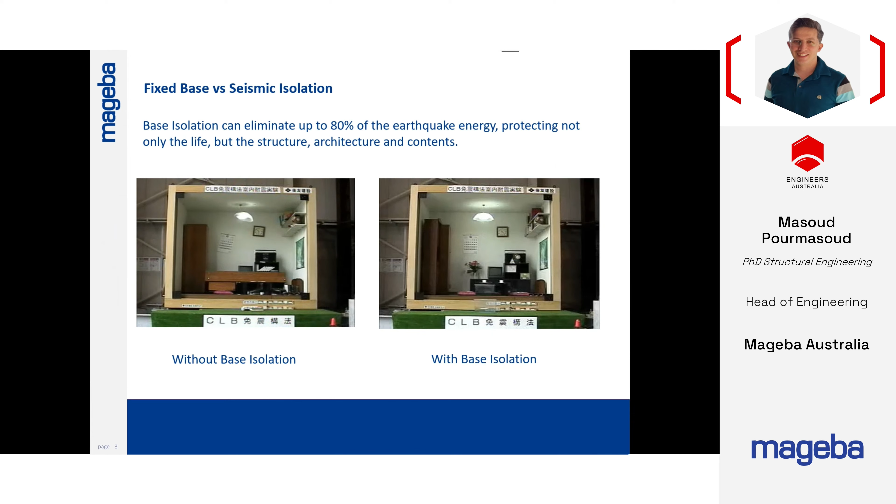I've got two quite simple physical models that illustrate how base isolators work. On the left-hand side, you can see the performance of a fixed base structure during an earthquake. The point is that even if the structure itself remains intact and sound, non-structural elements like decoration, lighting, or piping, which are quite sensitive to acceleration, are going to be damaged severely. On the right-hand side, you can see the concept of using base isolation. As you can see by movement of that box, the content remains kind of intact with minimum vibration, and doesn't end up with any level of damage.

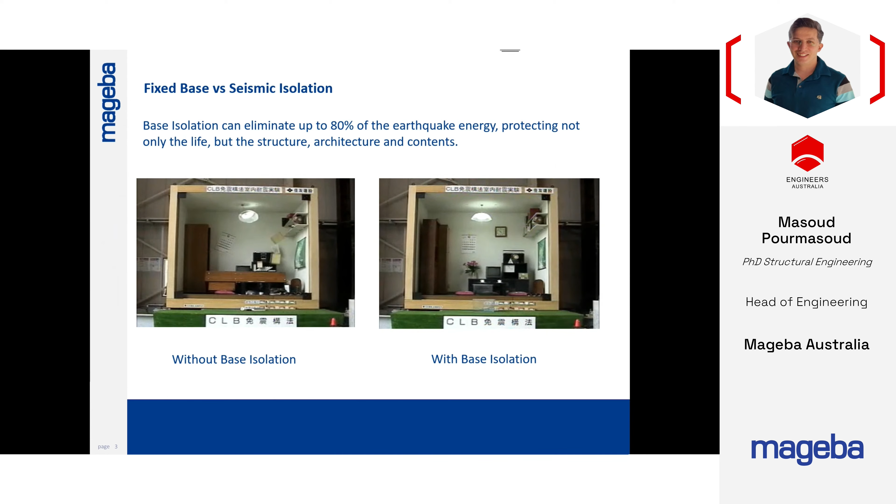This next one is a full-scale test that was carried out many years ago, but it's quite interesting for engineers to see how a real project works. The first one starts with a fixed base option.

9, 8, 7, 6, 5, 4, 3, 2, 1, running.

The violence and severity of the quake is clear. This would be a frightening experience not soon forgotten. The forces and displacements on the structure are extreme. At points during the shaking, floors 2 and 3 are displaced by nearly a foot in both directions. The heavy upper cladding is shaken violently, but remains attached. The lower cladding tears like paper. Interior furnishings are thrown about by the violent accelerations. Those that are unrestrained are tossed about like toys, while anchored items ride out the seismic storm, jerked to and fro, along with the walls and floors to which they are attached.

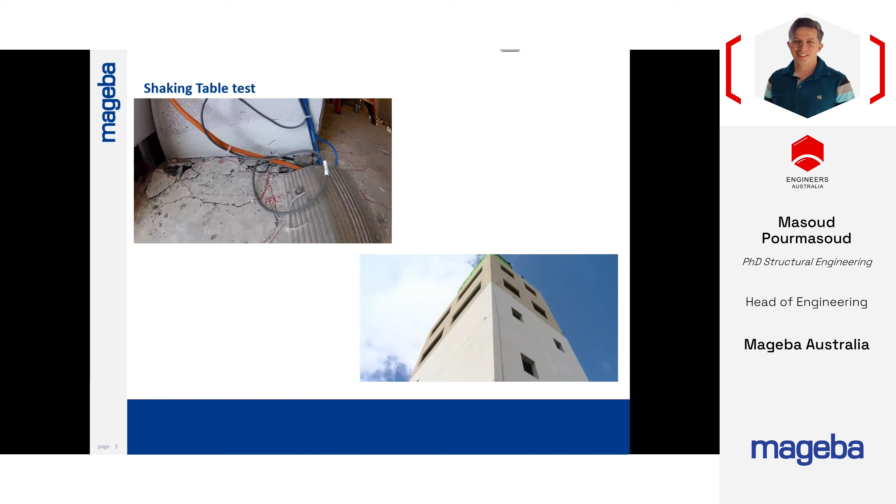We can see the rebars, they are naked now. At different floors, you can see the formation of the punching failure mechanism of the slab around the column, not far from really collapsing. From the 3rd floor to the 4th floor, the stairs are detached, they are hanging. There are a lot of huge gypsum boards that detached and fell off.

The building didn't collapse, however, it was prone to collapse actually. But before this test, the base isolated option was tested first because the researchers knew that it's not going to end up to any level of damage. So they first tested the base isolated one, and after that went for the fixed base one. And here we are, we're gonna go for the base isolated option.

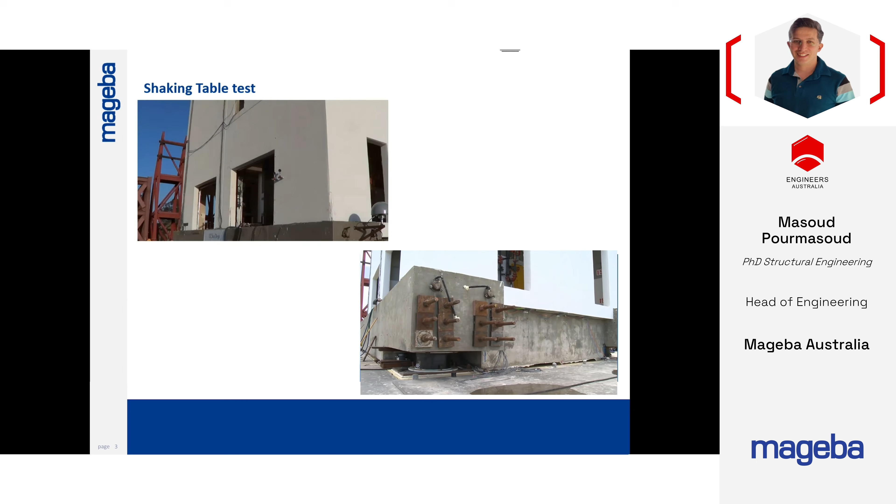Prior to conducting these ultimately damaging tests, the team had tested the building on seismic isolators in order to directly compare the effects of seismic isolation on the performance of non-structural elements. These huge rubber pads, each weighing over half a ton, support the building on 4 points, one at each corner of the structure, isolating the building from the earth and its motions.

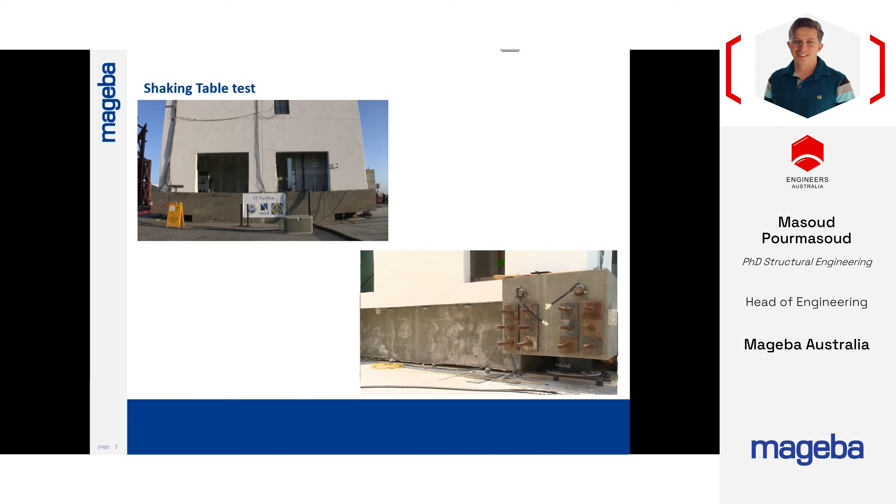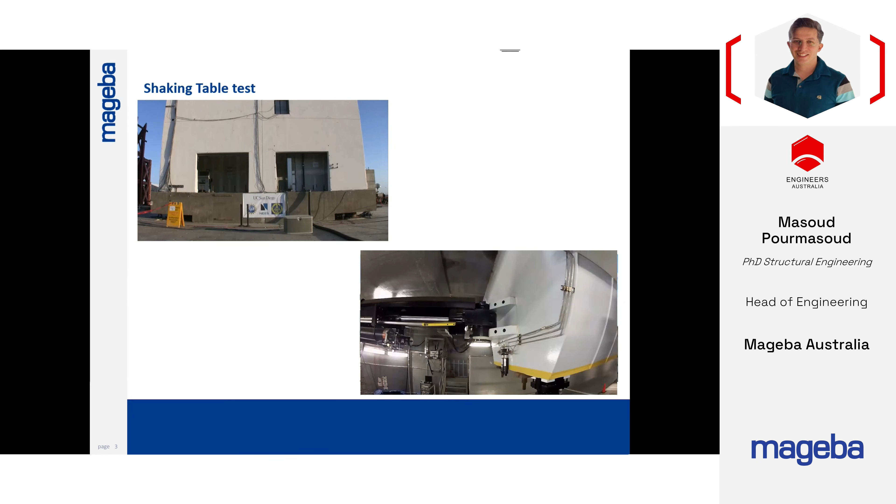In a test using a record from the magnitude 8 Ica, Peru earthquake of 2007, the effect of base isolation becomes obvious. As the table displaces, the isolators provide elastic joints between the earth and the structure, dramatically attenuating the accelerations that are transmitted to the building. The contrast with the motions in the other tests is clear.

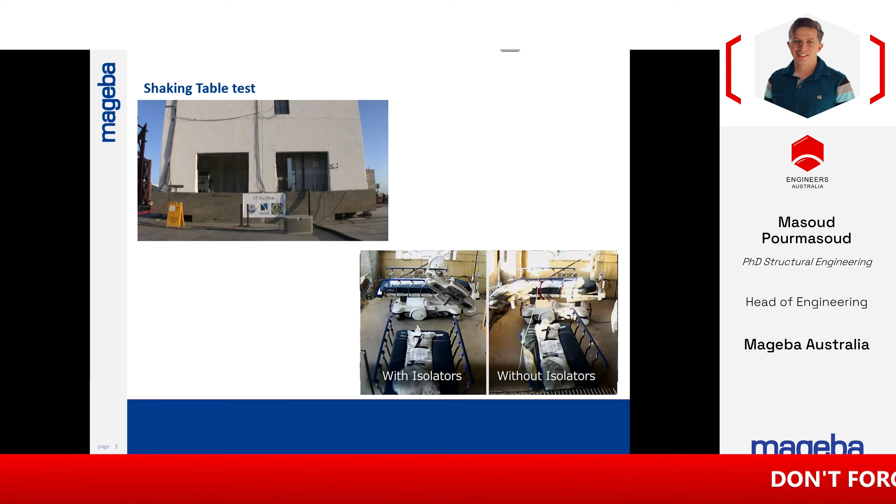With isolators, the building slides back and forth smoothly and easily. While objects and fixtures shift, the violent displacements and the destruction they wrought upon the building in the fixed foundation tests do not occur. 90% or so of the displacement that actually was imparted on the building was absorbed by the isolator, and so the result is relatively minimal impact on the contents and the non-structural elements in the building.

The hospital could remain functioning. The patients would be safe. The equipment, critical support equipment, would remain functioning. The electrical system in this building remained functioning, so life support equipment for patients would remain functioning. That's essential. The elevator remained functioning. The stairs were completely intact, so paths of egress through the building remained functional.

As you saw, for the fixed base option, most of the non-structural elements tossed around and damaged severely. However, for the base isolated one, all elements, including structural and non-structural elements, moved around quite gently. So the next question is how it's going to happen in reality.

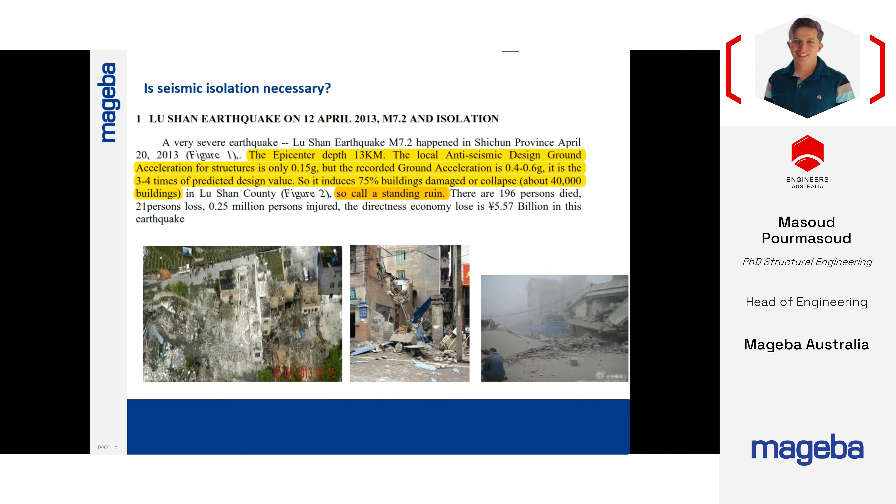To explain this question, I'm going to refer to a couple of earthquakes. The first one is what happened in China in 2013. It was an earthquake that was not necessarily in a seismic region, and the design acceleration for that region was predicted at something about 0.15 G, while what happened was considerably more than that, something about 3 to 4 times more, which ended up causing plenty of collapse and damage, particularly to concrete buildings.

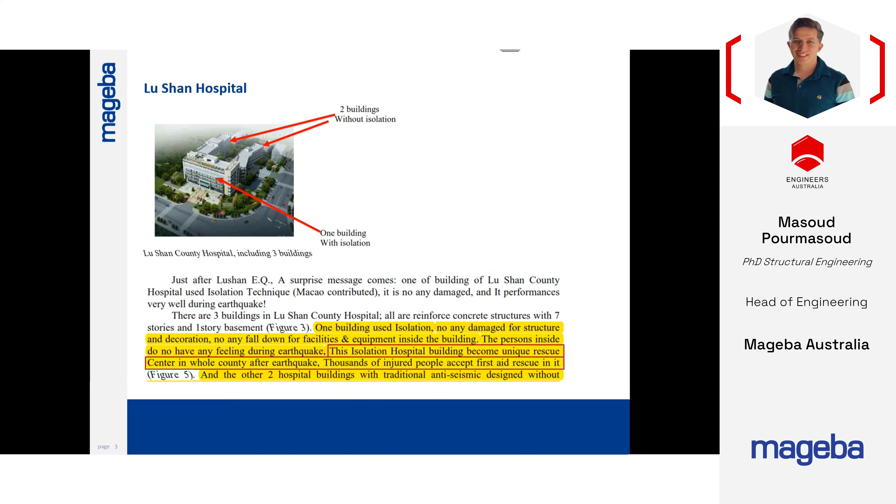The second one was an earthquake of magnitude 7.5, and the base isolated hospital was quite close to this one. There were two specifications for that earthquake. First, we've got another hospital campus, where one of the buildings was fixed base and another one was base isolated, so we could compare the performance of these two hospitals together.

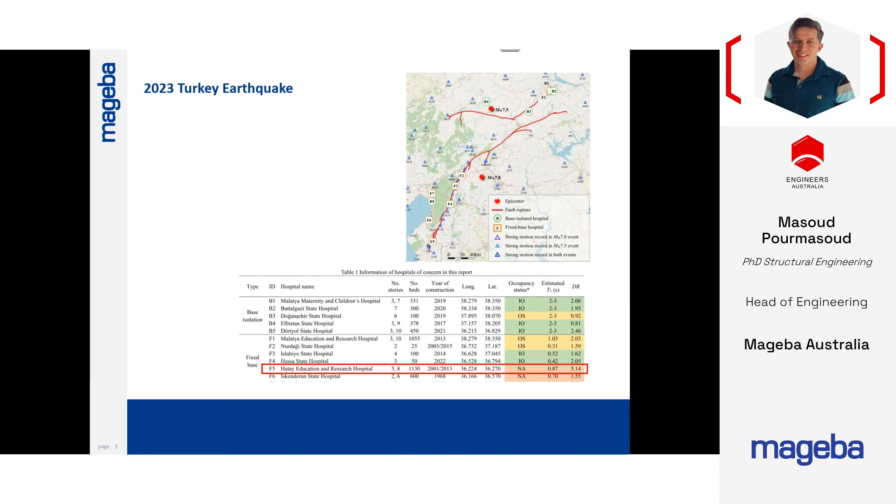The second one was a hospital called Hatay Education Hospital. It was almost brand new, completed in 2013, so it was just 10 years old, and it has more than 1,000 hospital beds in this project.

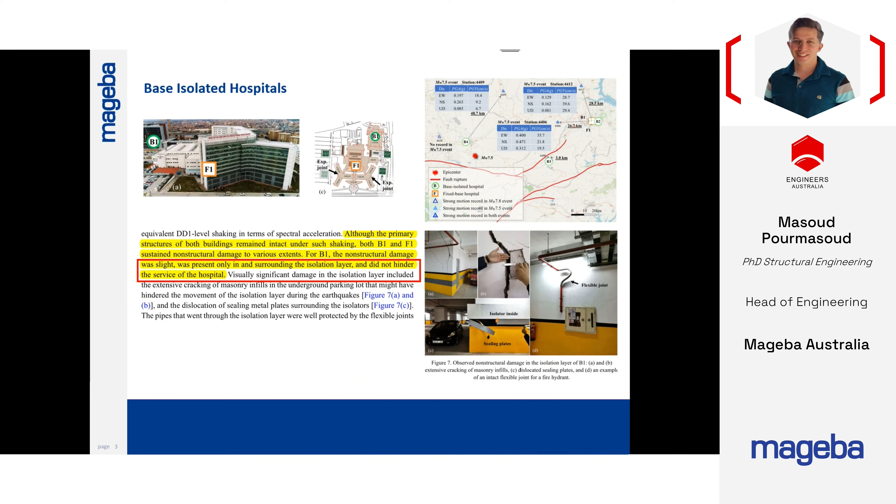However, it still ended up causing some damage to the fixed base project. As you can see in the report, for B1 the non-structural damage was quite slight, present only surrounding the isolation layer, because normally isolators have some cover around them, and during the movement of the earthquake some of those covers might be damaged. However, the superstructure remained functional after the earthquake and worked as normal.

On the other hand, the fixed base hospital ended up with some damage, particularly to non-structural elements. The interesting point in this report was that the manager of the hospital said that they sent workers to repair the damaged non-structural elements after the earthquake.

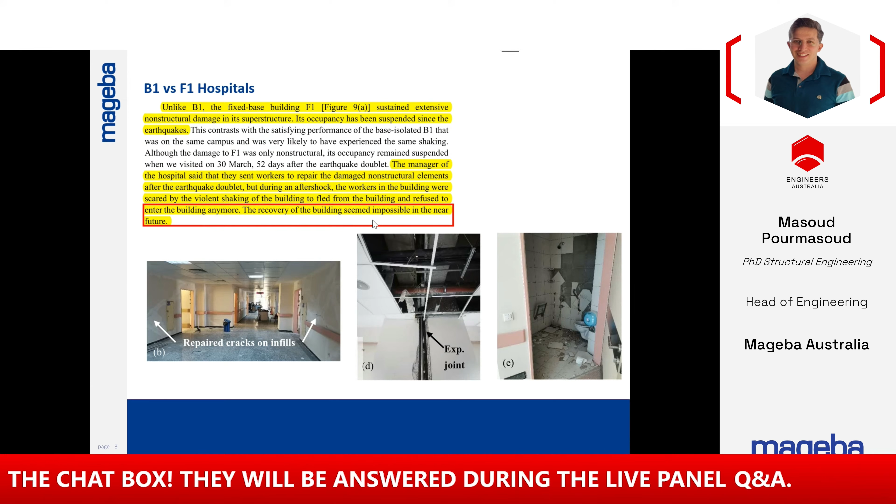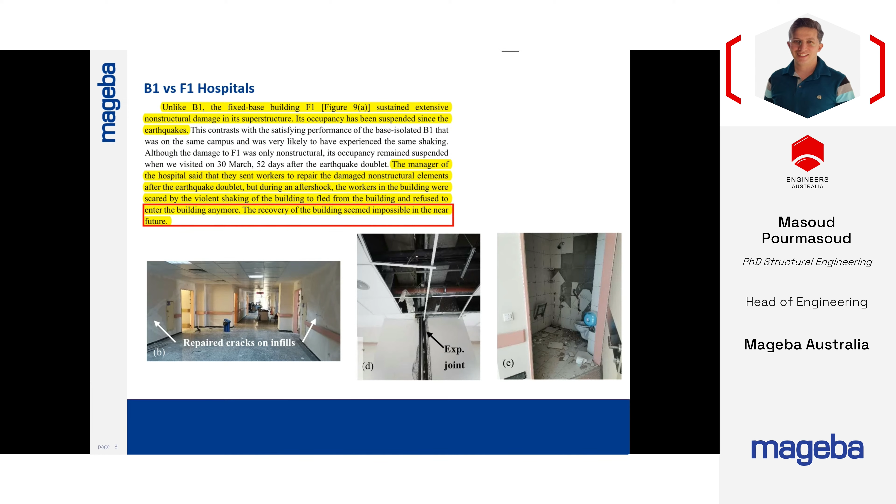But during an aftershock, the workers in the building were scared by the violent shaking and fled the building, refusing to enter it anymore. The recovery of the building seemed impossible in the near future. This illustrates the downtime we normally face after an earthquake, which ends up keeping the project unusable for probably at least months, or maybe years.

Another example I'm going to go through shortly is the performance of bridges during the 2010 Chile earthquake. It was a quite strong earthquake that was followed by a tsunami as well, and unfortunately ended up causing a lot of casualties.

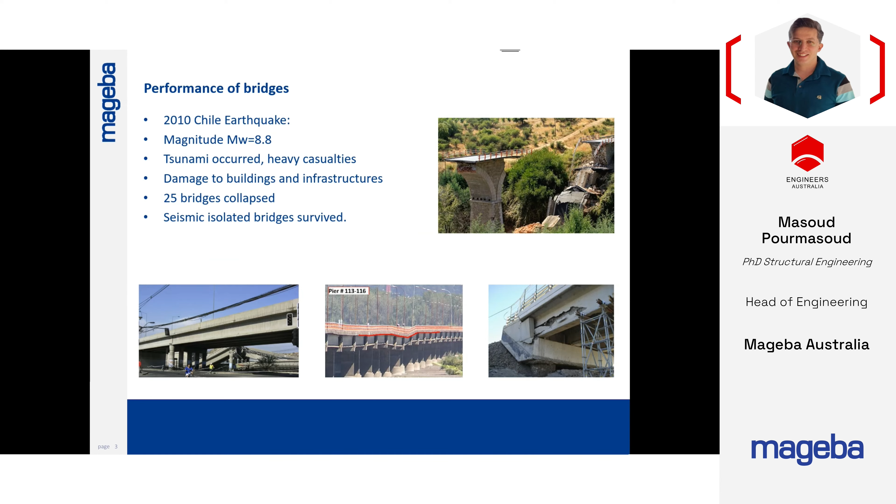During this earthquake, many buildings and infrastructures were damaged, and about 25 bridges collapsed. However, fortunately, seismically isolated bridges survived. In this slide you can see a number of bridges—all of these photos were taken after the earthquake, and fortunately all of them remained functional and intact.

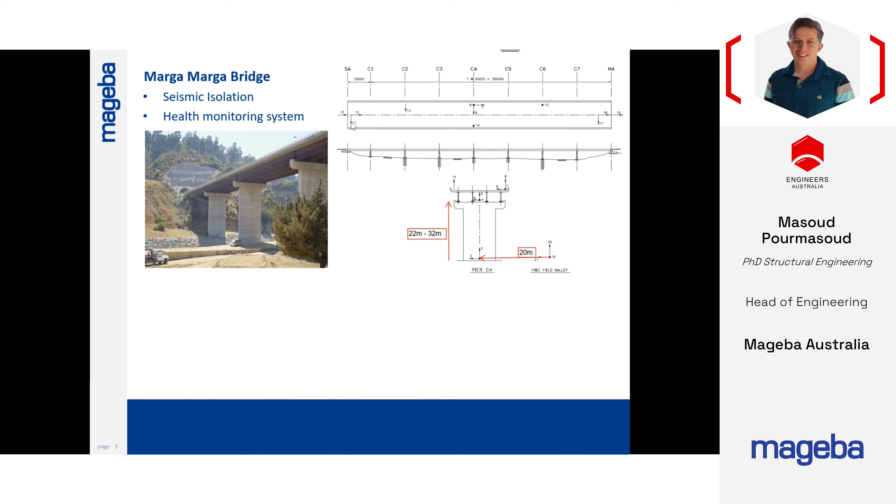These are the records taken after the earthquake. You can see that on both sides of the bridge there are two sensors—sensor 11 on the left-hand side, located on the ground at the abutment, and on the right-hand side we've got sensor 17.

The level of acceleration recorded by these sensors was about 1.9 and 1.4. However, on the deck, the acceleration considerably decreased, ranging from 0.6 to 0.3. As you can see, a reduction of acceleration by half happened due to the base isolation system, which shows how influential the isolators have been in decreasing the acceleration.

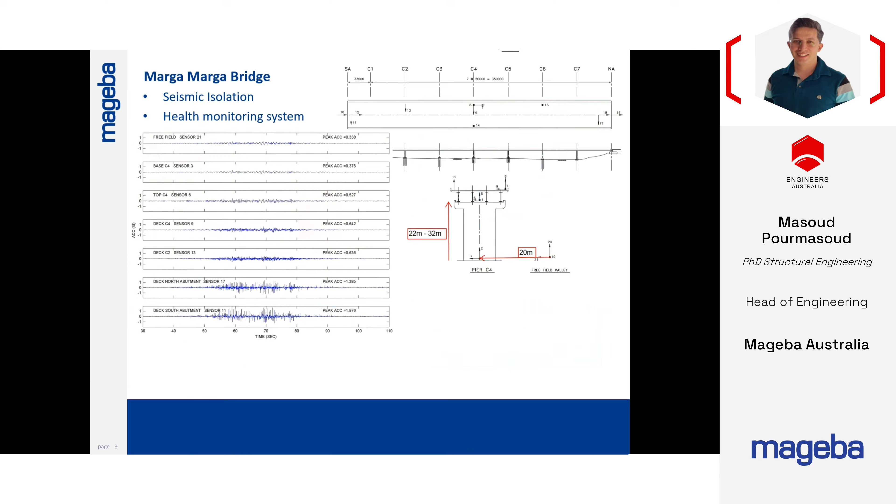So how do seismic isolators work, and what minimized the damage? The point is that by using base isolation, we increase the period of the structure. For buildings, we normally consider a period 3 times that of a fixed base building, and this is almost similar for bridges. Bridges are definitely softer than a fixed base building, however we still increase the period of the base isolated one to at least 2 times that of a fixed base bridge. We also increase the damping from 5% to at least 20%.

So as you can see, by increasing the period and increasing the damping, the demand and acceleration on the superstructure for buildings, and on the substructure for bridges, is going to considerably decrease.

For example, for a building that has a fundamental period about 0.05 second or 0.1 second, the acceleration imparted to the building would be about 0.6 g at least. It's going to be amplified along with the height, and the floor acceleration on the top floor of a 5-story building would at least reach about 1.5 g, which means medium to extensive levels of non-structural damage. However, by using seismic isolators, the period is increased to at least about 2 seconds.

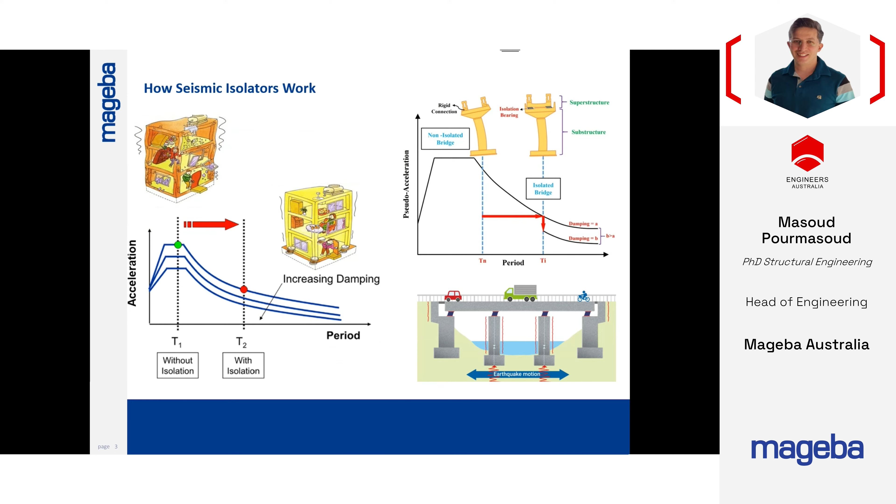And the acceleration at the isolation level is attenuated by 80%. So ideally, we consider the superstructure acceleration to be about 0.3 g, to make sure it doesn't end up with any level of damage.

There are some main differences in using isolation for buildings versus bridges. For bridges, the weight of the superstructure is concentrated in a single horizontal plane at the isolation level. However, for buildings, it's distributed along the height as a multi-story building. Also, for the bridge, the superstructure is robust in terms of resistance to seismic loads, but the substructure, piers, and abutments are vulnerable. So the most important point is that we use base isolators for buildings to keep the superstructure safe during an earthquake, whereas for bridges we use isolators to decrease the demand on the substructure. This is the most important difference between using isolators for buildings and bridges.

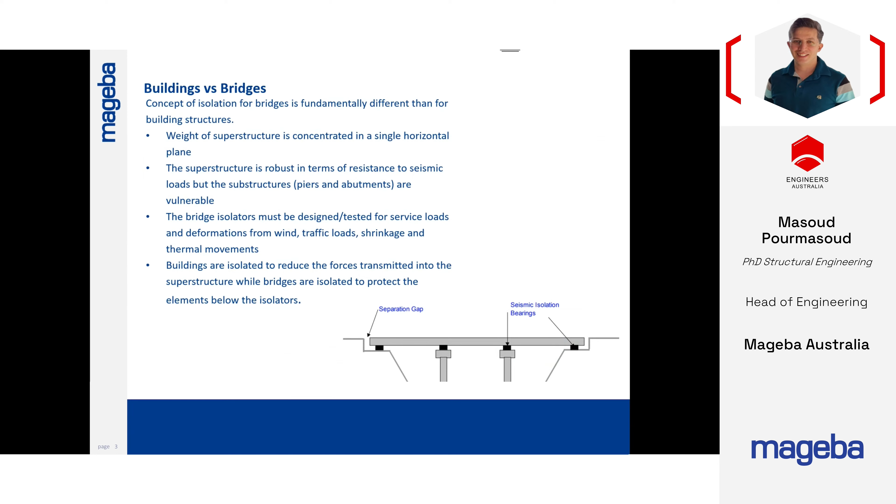If you are designing bridges, particularly for seismic action, I highly recommend going through this document, Seismic Performance of Isolated Bridges under Beyond Design Basis Shaking. It covers very important data and gives us a kind of rule of thumb for when isolation is required for bridges.

I've noted that if the bridge has stiffer piers with a high natural frequency, base isolation is highly recommended, based on this code. Also, if the shape of the bridge is non-regular, isolation is again highly recommended, and if the expected ground motion has a dominant high frequency content.

In addition to these tips, this guideline talks about the experience of the US in using base isolated bridges. It discusses a bridge near San Francisco that was first built in 1950, and after a few years was retrofitted in 1985. During the Loma Prieta earthquake in 1989, no damage nor visible signs of distress were observed, which is quite important. It also mentions that in past earthquakes in the US, there was reported damage to conventional bridges, definitely without isolation.

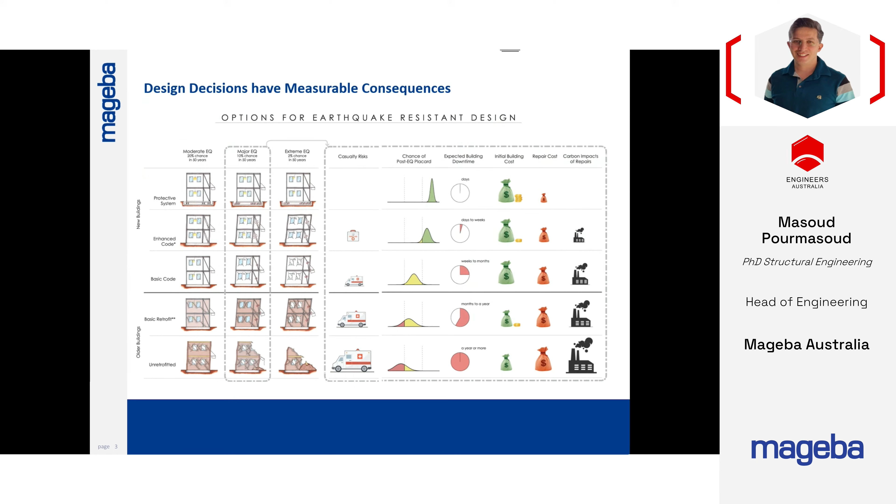So the main important question is whether Australia is seismic, and if a base isolation system is necessary for Australia. What we need to consider is that we've got some records of sort of strong, medium, not necessarily strong earthquakes. We can say it has been kind of medium, because most of them have been less than or around magnitude 6, however strong enough to end up causing some damage.

You can see the list of earthquakes that have happened in Australia. The most important ones have been Newcastle, which was 5.6, and another one was Adelaide, again 5.6.

On the bottom left hand side, you can see a piece of paper from 1954 that shows the quake hit many homes and ended up terrifying people running around the street. On the right hand side, you can see some photos from this earthquake showing the level of damage.

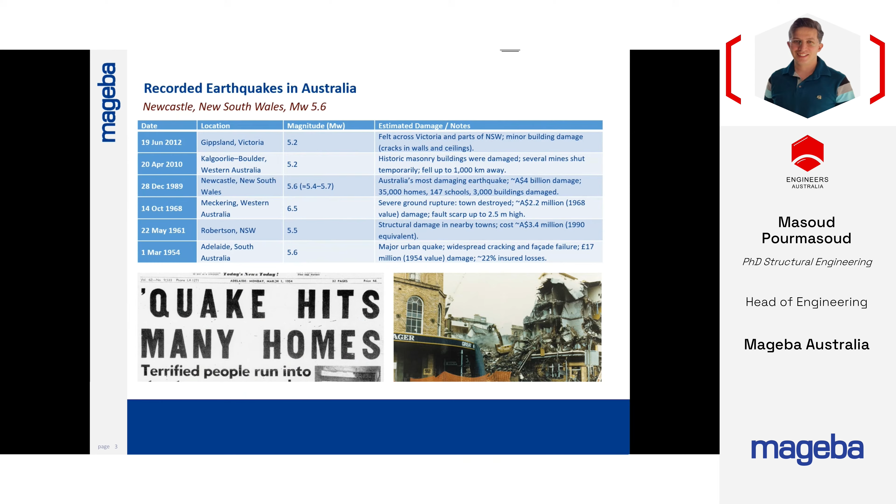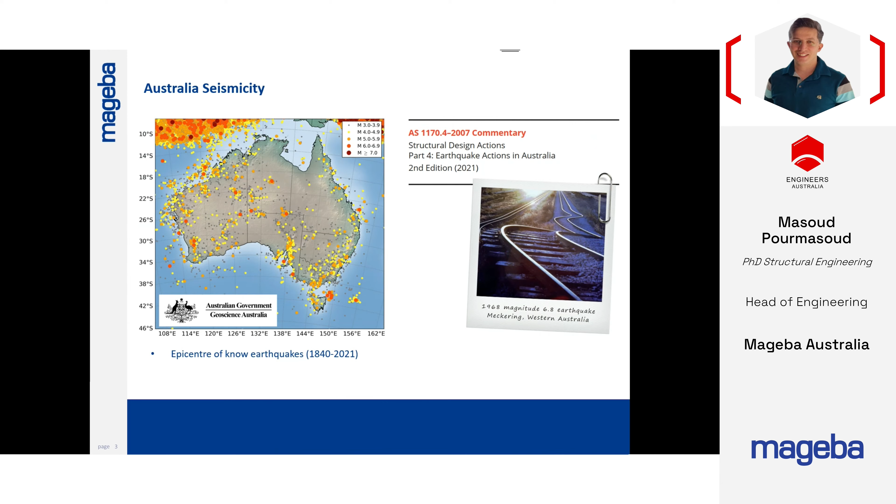Australia Code 1170 was published, I think, in 2021. This diagram on the left-hand side shows the epicenter of known earthquakes. As you can see, some medium to strong earthquakes have happened across the country, and particularly in the south, some magnitude 6 to 7 earthquake events have happened as well. This one is from 2021.

However, in 2022, another report was published showing that apparently Adelaide is a high seismic zone as well. There is a quote from one of those researchers saying that we calculate the 55-kilometer active length of this fault could potentially host an earthquake as large as magnitude 7.2. There are two main active faults under Adelaide, and one of them is right under the CBD.

It is written that if this earthquake happens, it's going to be 30 times more than what happened during the New Zealand earthquake. That's going to end up causing huge damage as well.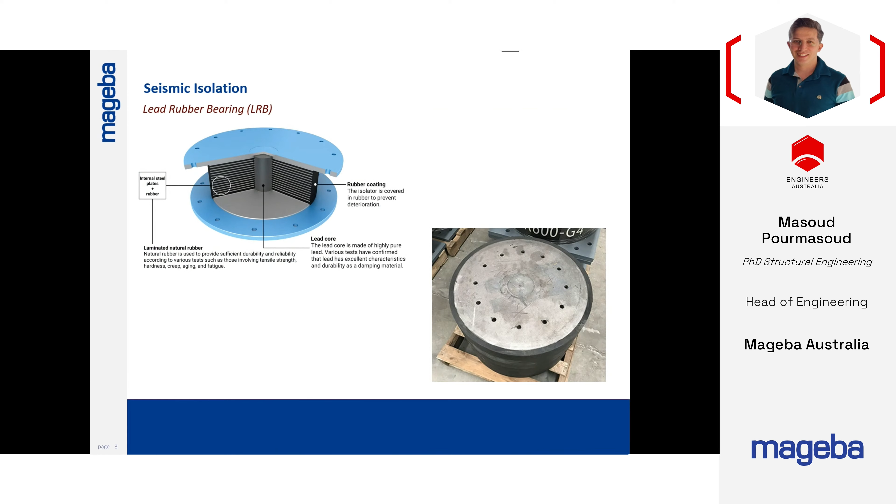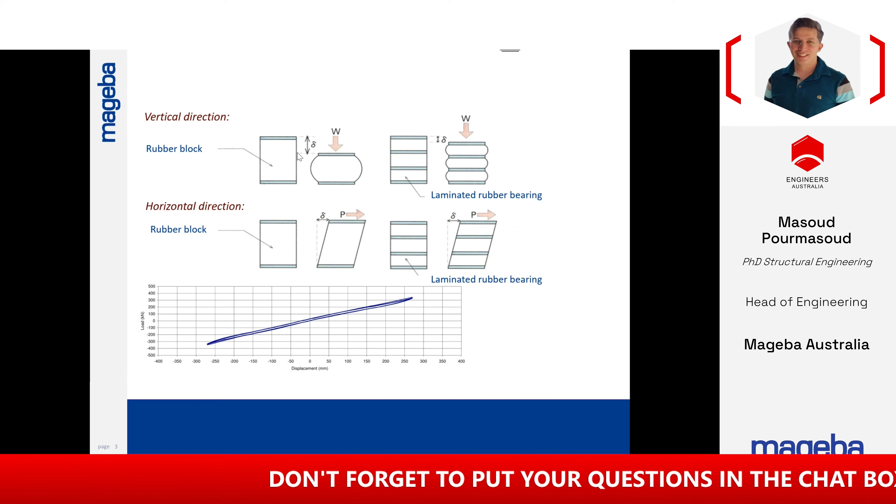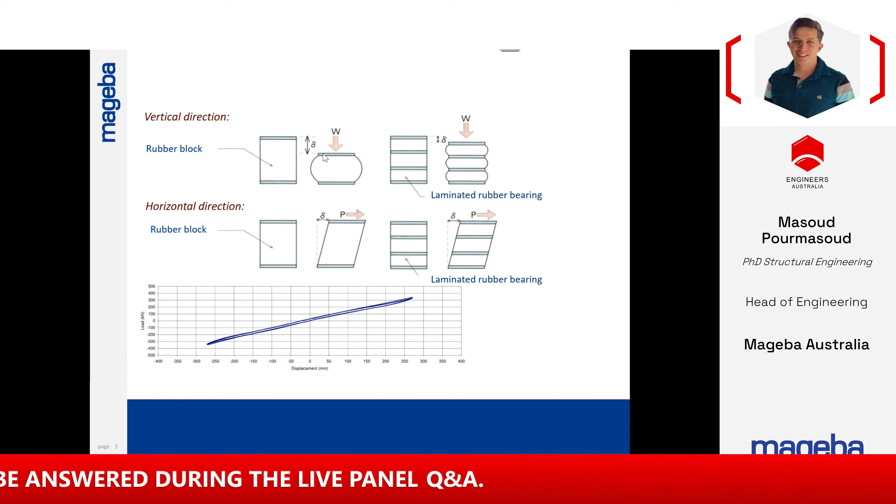LRBs are formed by rubber layers plus some steel shim plates in the middle, and a lead core in the middle, or probably multi-lead cores. What the steel shim plates do is minimize the vertical deflection. If you just consider a rubber block, the vertical deformation is going to be high. However, by using shim plates, we can decrease the vertical deformation without affecting the lateral movement or lateral flexibility. What the lead core does is provide damping.

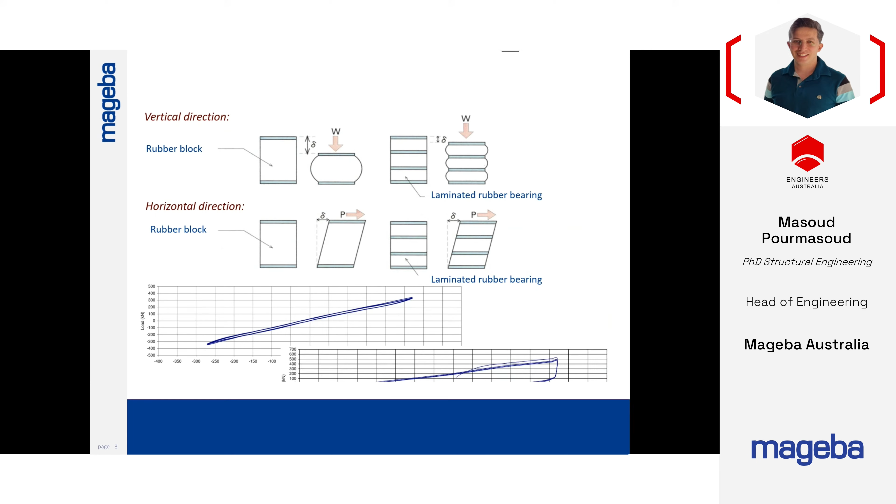For natural rubber bearings, without the lead core, you're going to end up with a hysteresis loop like that. By using a lead core, you can provide up to 25% damping, and your hysteresis loop is going to be fatter as well, which ends up minimizing the movement.

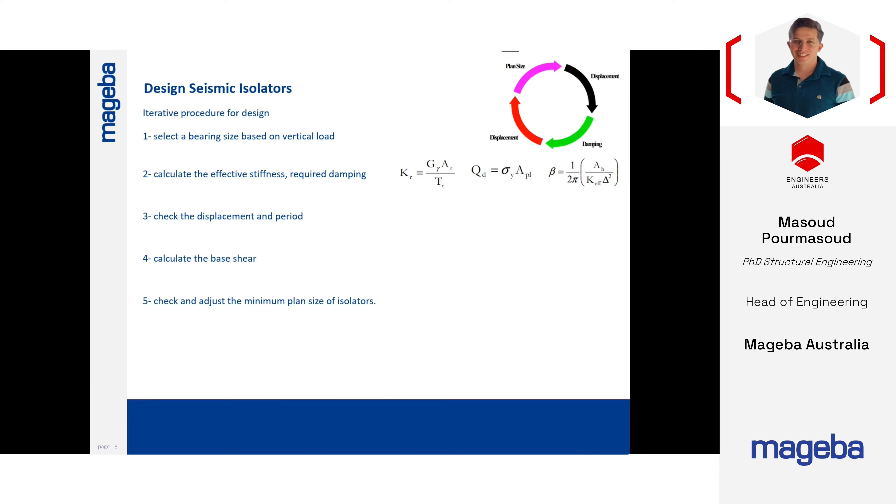I think due to time, I need to go a little bit faster. So designing base isolators is a kind of iterative procedure. We start by selecting the size of bearing, making some guess in terms of the size, and after that we calculate effective stiffness and damping. Based on this data, we can draw up the hysteresis loop of the isolators, and from that we can calculate the period and the required displacement, followed by the base shear coefficient.

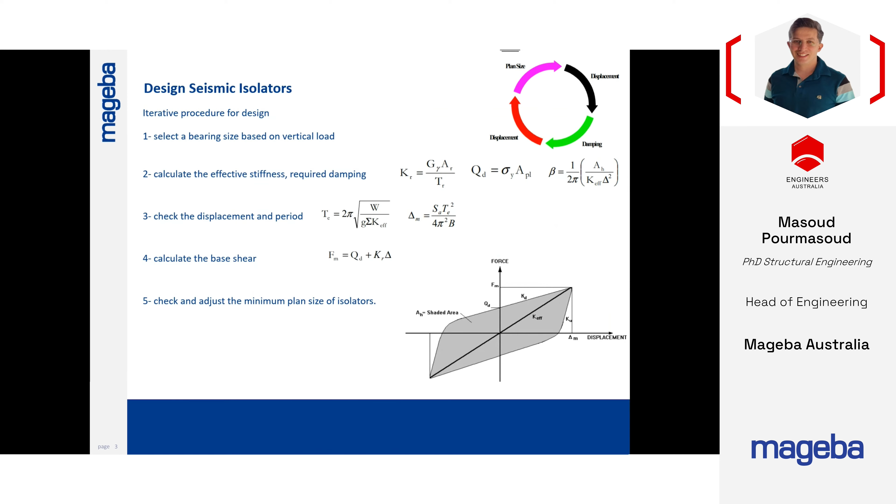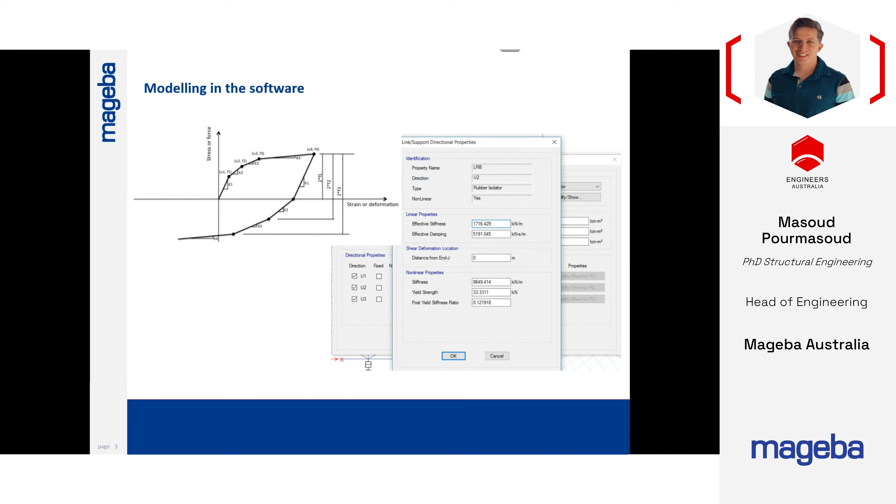And this is the number that we need to calculate and design the superstructure. This kind of data will be passed to the consultant or structural engineer to be considered during the designing.

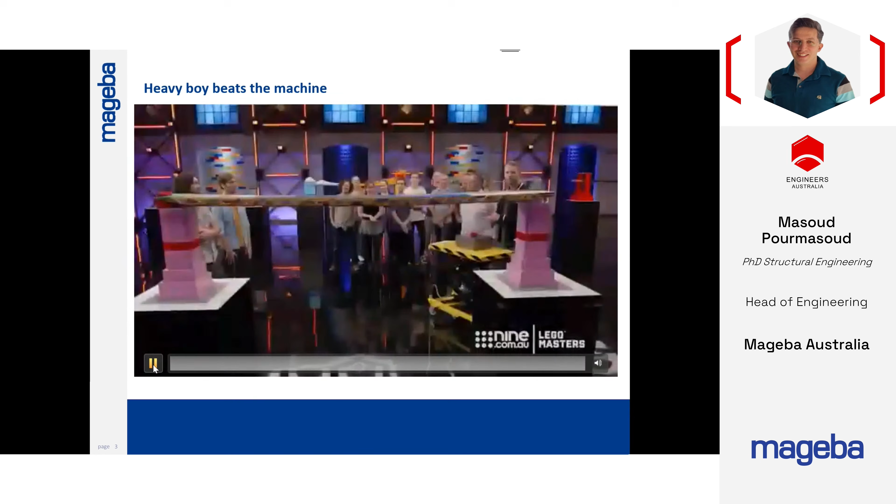Before I hand over my presentation to my colleague Virendra, I'm going to show you a piece of movie which is quite familiar for you.

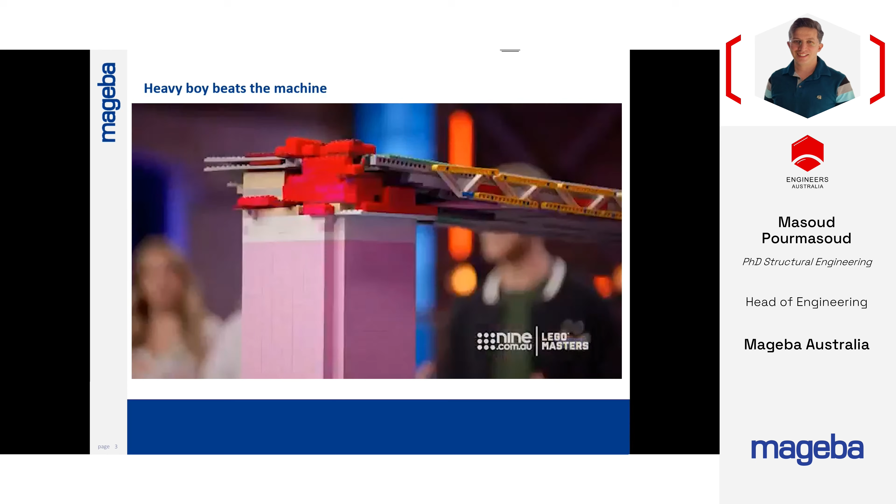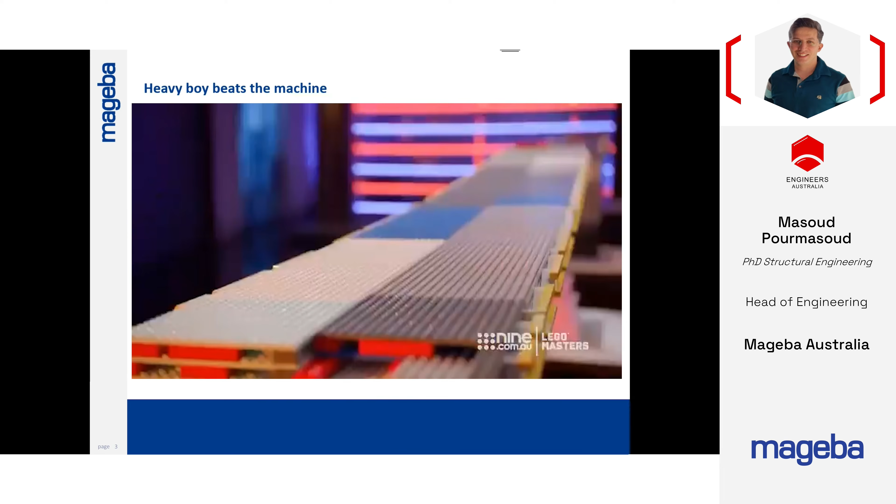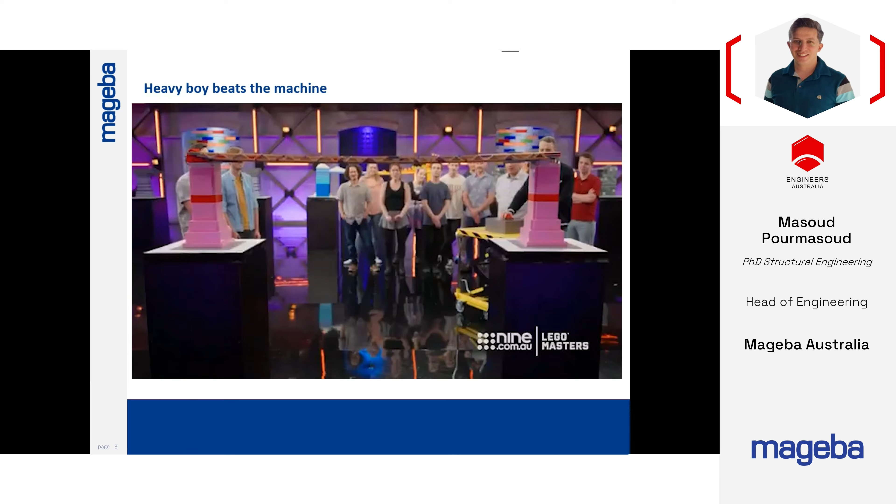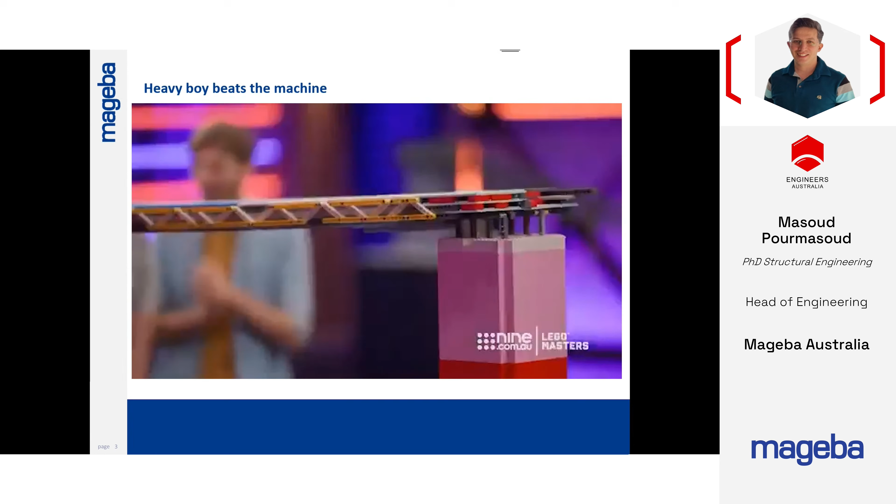This is one of those Australian Lego masters that is about making a bridge and testing on the shaking table test. You guys, I feel like, started with an aesthetic plan and then just rapidly abandoned it to get a bridge made. You can see where the panic set in. It's like a beautiful graph of confident, confident, confident, panic. I think objectively ours is the worst looking bridge in the room. But the only thing we have going is it's got a lot of bricks. It's a very heavy boy. Hopefully that weight of the heavy boy can really fight against the machine. Yeah. Brickman, the pillars are great. The top is great. We just couldn't figure out the mounting mechanism. And so far, they've been the weak points in all of our bridges. So we'll see how we go here. All right, you guys are on 4 wins in a row. You've held the titanium brick of triumph for a long time. You win here, the liquid titanium streak continues. Let's see how this heavy boy goes. Level 2? Yeah. All right, number 1, here we go. I'm sorry. It's a heavy boy. I feel like it's handling number 1, taking it to level 2. Oh. Heavy boy's starting, a little bit of creaking. Heavy boy's shoes are falling off. Heading to 3. Got to do some time at 3. I think this is where Heavy Boy might. Unsettled. He's holding. Come on, Heavy Boy. Come on, you can do it, Heavy Boy. You can do it. There's a lot of creaking, but it stays up. All right, let's go level 4. Come on, for all the heavy boys. Do it for the big boys. All right, it's loose, but it's on. Level 5. Actually, that's not working. It's like separated. It's totally like floating. Level 6. It's too heavy to move. It's not going anywhere. The bridge is just kind of hovering above the second pillar. Level 7. It is just, it's like surfing. It's just not going anywhere, is it? All right, taking it to level 8.

This movie exactly shows the concept of base isolation for bridges. No one expected that this bridge would tolerate it, and it kind of floated, but that means it was actually base isolated. That was the main reason this heavy boy didn't collapse.

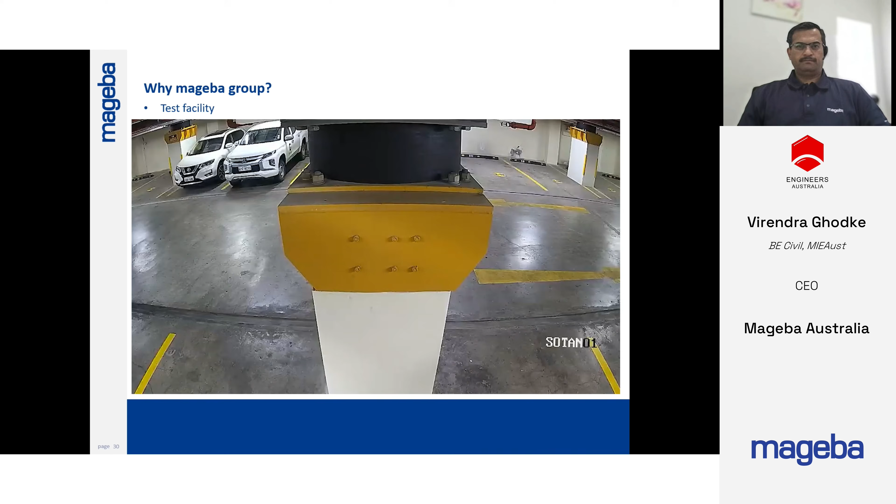Thank you for watching the video.

Why test facilities and testing are important: it's one thing to design a structure or a product or a solution for certain performance requirements. However, it's also critically important that we are able to test and verify that design before implementing it into the actual structure. It's quite prudent these days to challenge the norms or status quo in design, but it's equally important to test them before implementing into the actual structure, to avoid any shortcomings and identify any risks in that design which might have been overlooked.

Again, why Mageba Group? We test all of our products and we present the data in terms of test reports, graphs, and raw data where possible to the structural designers, so that they can incorporate those numbers into their structural models and ensure their model does actually behave as intended.

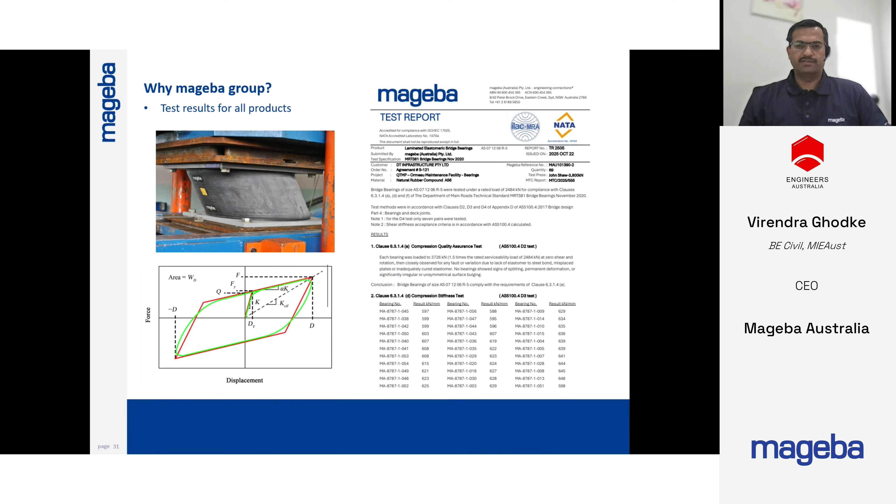Mageba Group has an in-house design facility, including Mageba Australia. We have over four experienced bearing designers, including seismic and structural engineers, with cumulative experience of well over 80 years in designing bearings to Australian and global standards. We use a state-of-the-art SolidWorks platform for designing and modeling bearings and expansion joints, and we are supported by tens of more designers across 20 plus Mageba companies globally, if and when required.

Most of our design team are active members of Standards Australia, or for that matter, the international code committees, which also provides more background as to the code requirements, and if required, more explanation as to why certain code requirements are there.

Local design team is a big asset for Mageba Australia, and we would like to extend that facility to Australia and New Zealand structural and seismic engineers to assist with their projects. This service is free for design teams across Australia and New Zealand.

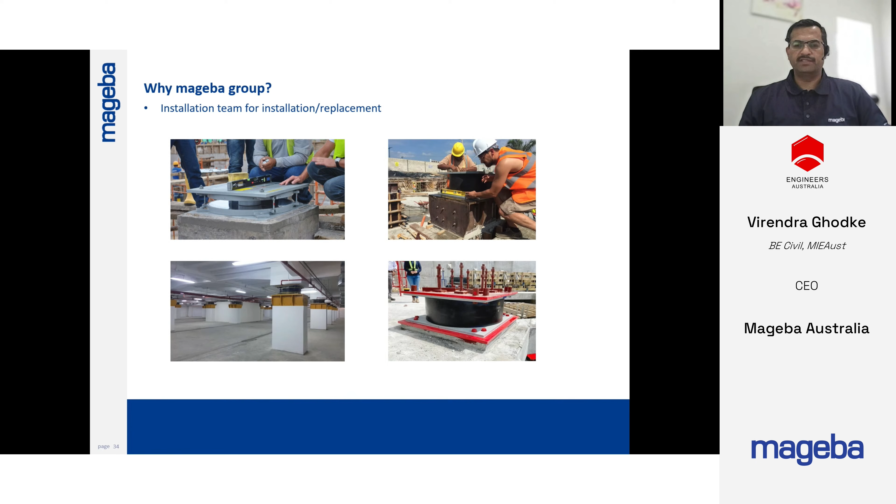Providing the products and designs is also complemented by Mageba's capability to install these products on site. Whether it's bearings, deck joints, or seismic devices like lead rubber bearings, pendulum isolators, shock absorbers and whatnot, Mageba has a capable network of subcontractors and an in-house team of engineers to assist with installation, ensuring compliance with various codes and specifications. A quick snapshot of what solutions or products Mageba offers to the market.

The Reston pendulum is a curved surface slider that behaves as if a pendulum is moving under seismic conditions, and it helps the structure come back to its more or less original position after the seismic event has occurred. It comes in either single curved surface slider, double curved surface slider, or triple curved surface slider.

Lasto LRB, the lead rubber bearing, and the high damping rubber bearing, are customized or improvised versions of normal laminated elastomeric bearings, where either the lead core or specially compounded harder rubber dissipates the earthquake energy and avoids damage to the structure.

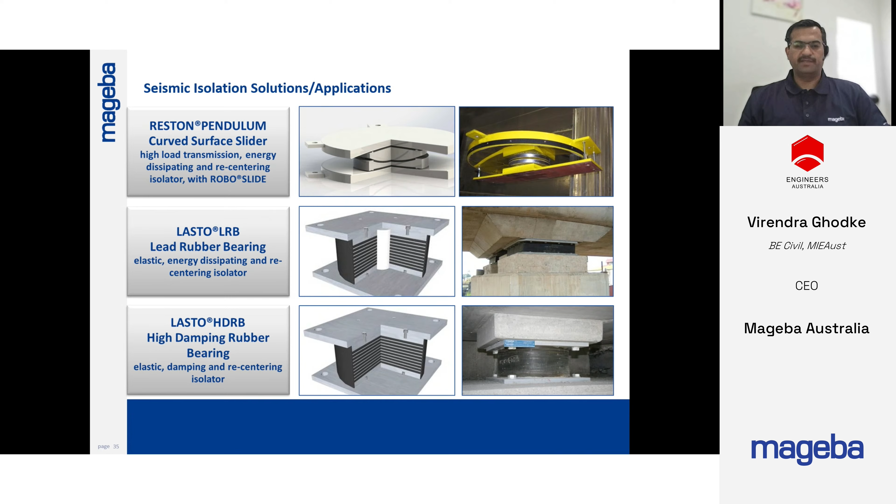Seismic isolation solutions apart from the bearings include shock absorbers, shock transmission units, and preloaded spring dampers. They have different internal construction mechanisms, however the principle they work on is very much similar.

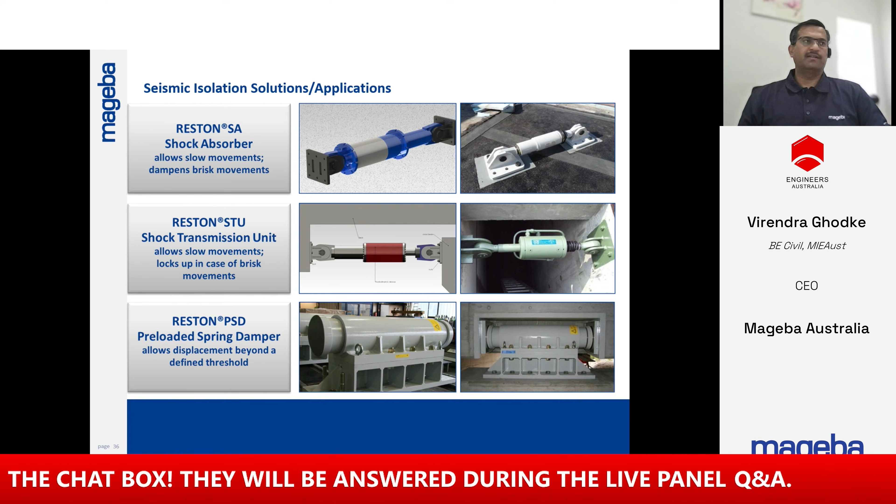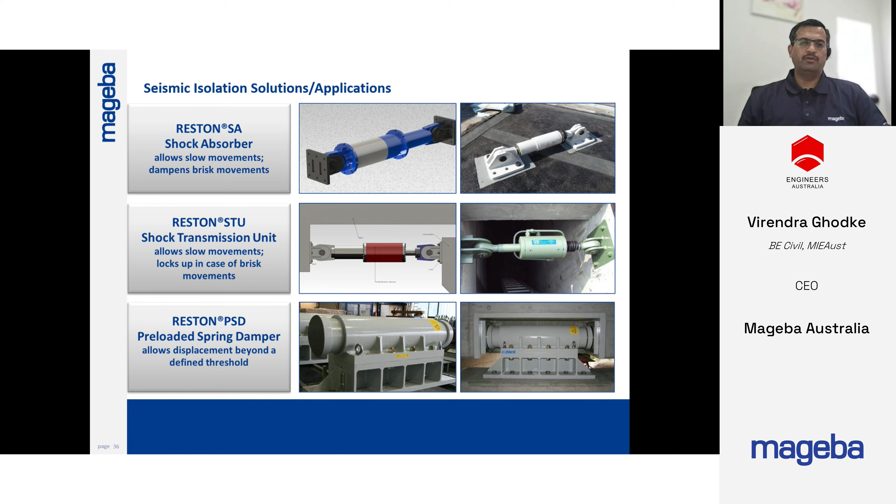As a quick analogy, they work similarly to the seatbelts in our cars these days. If you pull them slowly and steadily, they come off, but as soon as you get a jerk, they lock up and save you. This is how shock transmission units, shock absorbers, and preloaded spring dampers work. They are tuned to allow very slow and steady service movements, whether thermal or braking, but the moment they encounter a jerk from a seismic event, they lock up and transfer the load to the intended structural member rather than damaging the entire structure.

Some of our monitoring solutions include a permanent monitoring solution, which can be integrated as part of seismic isolators, bridge bearings, and deck joints, or a retrofit temporary, so-called portable monitoring device, which we can carry with us to monitor loads, movements, and rotations as and when required.

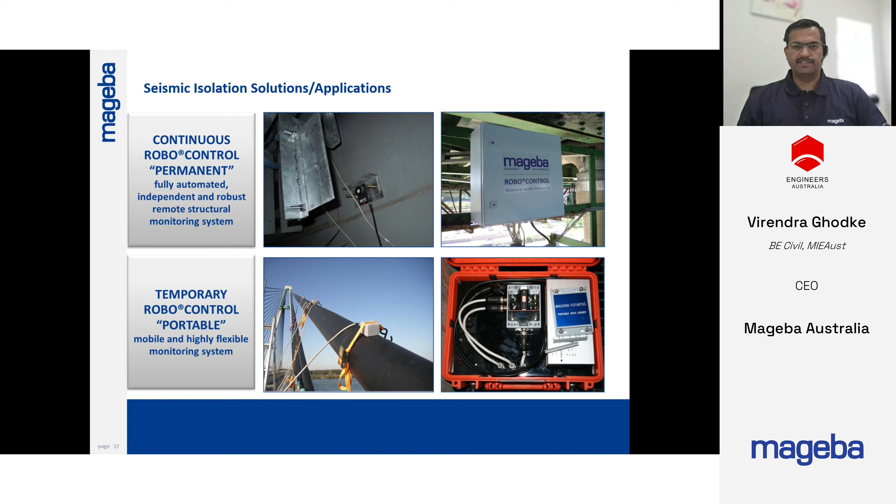Some project references where we have been successfully using our solutions to help engineers solve problems: the ANZ Triangle Centre project in Christchurch, where we supplied curved surface sliders to make this building completely isolated from earthquake events.

Sydney Opera House: the stage of the Sydney Opera House, as we may all be aware, rotates to create different scenery effects in the dramas and plays that are performed. This stage is supported by the Mageba solution, a bearing capable of taking seismic and non-seismic loads and movements.

Bunbury Outer Ring Road, Old Mangere Bridge, all these bridges have been equipped with bearings and expansion joints that are locally designed. Some of these products are also locally made in Australia, and some of them have been made in Mageba's Shanghai factory in China.

For seismic isolation reference projects in particular, we have oil refineries, we have commercial and industrial buildings of any sort that will need seismic isolation incorporated into its design to save damage to the property and the people.